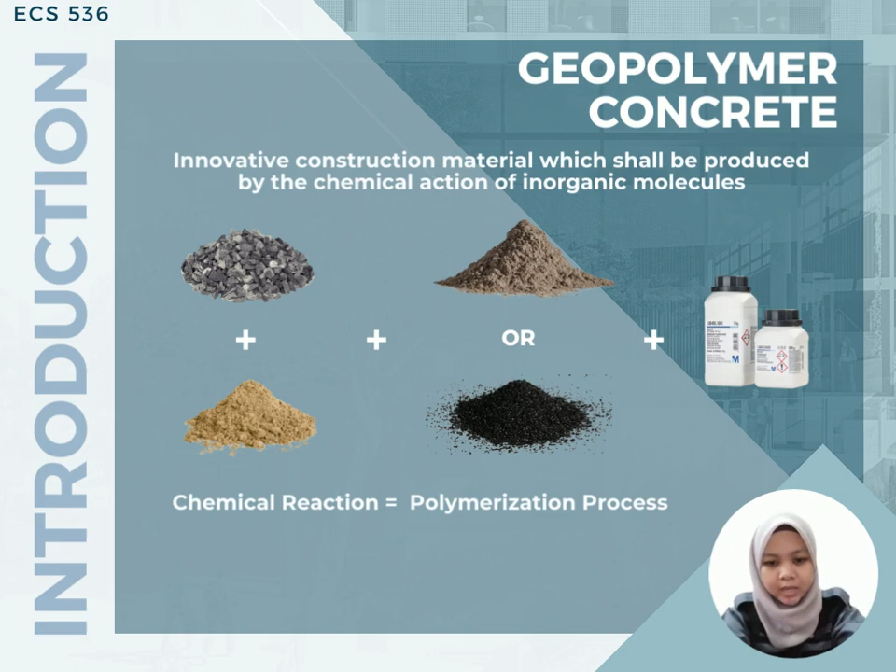Geopolymer concrete became widely employed in industry as a Portland cement substitution after its debut. The concrete floor components were constructed using the fly ash-based geopolymer concrete. According to research from the University of Queensland's Global Institute, the use of geopolymer concrete might lessen the greenhouse impact, although the self-healing process of the geopolymer concrete has not been studied further.

The durability performance of concrete is important as it needs to have an ability to resist weather attack and retain its original quality and serviceability when exposed to an aggressive environment.

No concrete structure material is inherently durable as a result of environmental interactions, and the properties of materials change with time. A material is assumed to reach the end of service life when its properties are changed or deteriorate after exposure to aggressive environments.

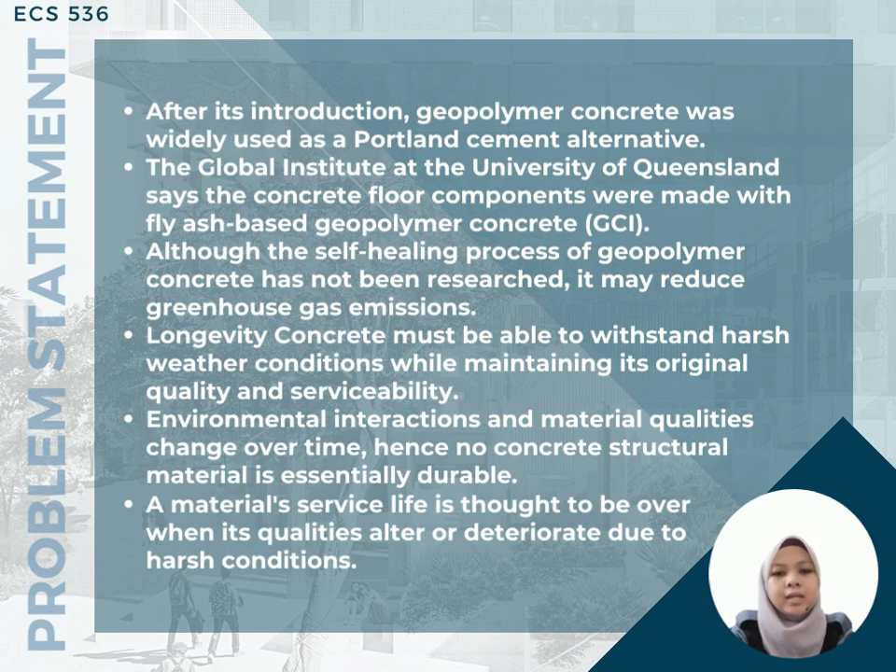Fly ash from coal-fired power plants that is low in calcium can be used to make geopolymer concrete. Low calcium fly ash is a byproduct of burning anthracite or bituminous coal. It makes up the majority of fly ash that can be found around the world.

The amount of power generated by coal-fired power plants, despite the fact that these plants are thought to be bad for the environment, is rising because of the huge amount of high-quality coal that can be found all over the world, and the low cost of electricity generated from this source. There will be a lot of fly ash available for many years to come, so don't worry.

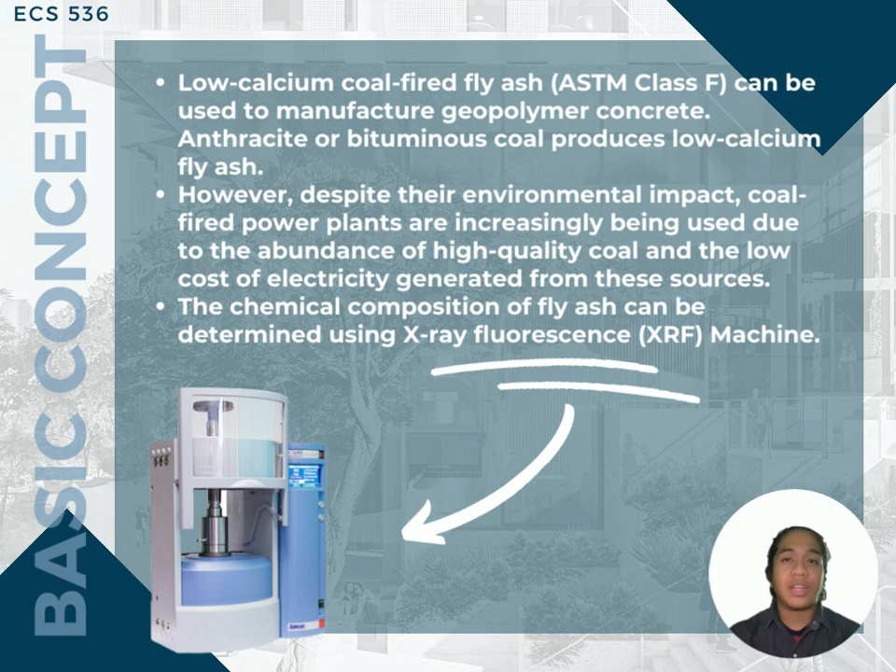Before using the fly ash, its chemical composition and particle size distribution must be found out. An X-ray fluorescence (XRF) test can be used to figure out the chemical composition of the fly ash. This figure shows the XRF machine.

Geopolymer concrete may be made using coarse and fine particles commonly utilized in the concrete industry. In the case of geopolymer concrete, the aggregate grading curves typically utilized in concrete practice are relevant. Some calcium-rich source material like blast furnace slag can be mixed in with the geopolymer concrete mix to speed up the setting time and make it easier to cure at room temperature, so it can be used for building.

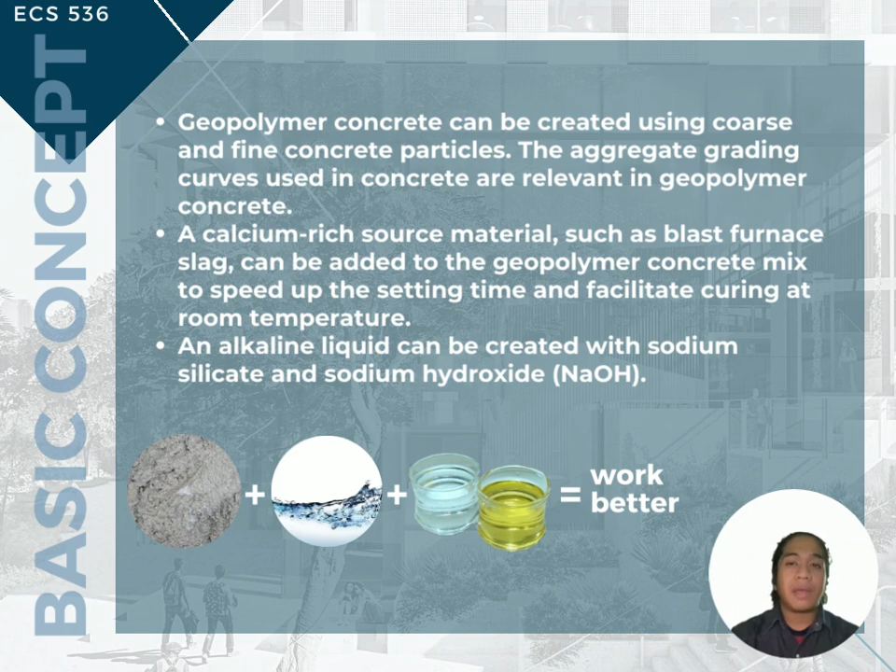Adding more water and a superplasticizer to the mix can help it work better. There is an alkaline liquid that can be made with sodium silicate solution and sodium hydroxide solution. It is recommended that the alkaline liquid be made at least 24 hours before it is used.

There are 5 properties of geopolymer concrete. First is unit weight. Unit weight of the low calcium fly ash based geopolymer concrete is similar to that of Portland cement concrete, varying between 2,330 and 2,430 kg per cubic meter.

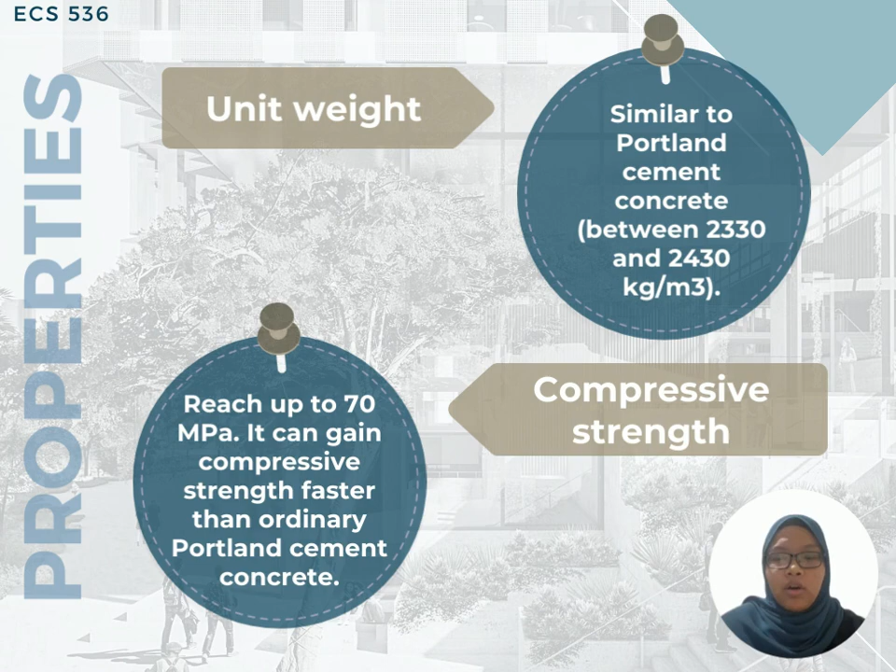Second, compressive strength. Compressive strength of geopolymer concrete has been found to reach up to 70 megapascals. Moreover, the concrete gains its compressive strength faster than ordinary Portland cement concrete. Third, sulfate resistance.

Sulfate resistant: low calcium fly ash based geopolymer concrete has an excellent resistance to sulfate attack. There was no damage to the surface of test specimens after exposure to the sodium sulfate solution up to 1 year.

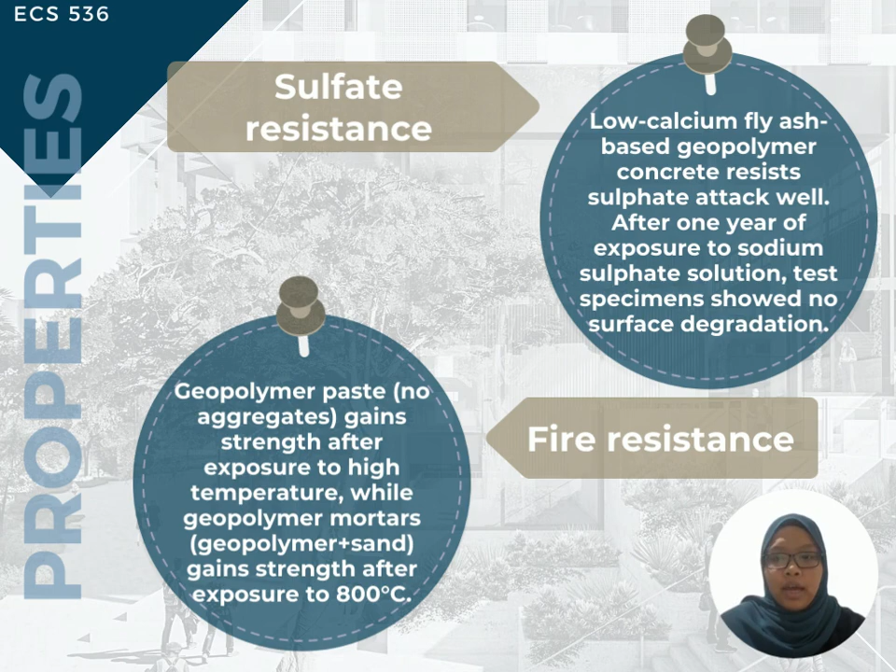Fourth, fire resistant. Tests showed that geopolymer paste, with no aggregate, gains strength after exposure to high temperature, and geopolymer mortars, which is geopolymer plus sand, sometimes increase in strength and other times decrease in strength after exposure to elevated temperature of 800 degrees Celsius.

And lastly, creep and drying shrinkage. Fly ash based geopolymer concrete undergoes very little drying shrinkage, about 100 micro strain after 1 year, compared to 500 to 800 micro strain experienced by Portland cement concrete, indicating a significantly smaller value.

The creep coefficient after 1 year of loading for geopolymer concrete with compressive strength of 40, 47 and 57 megapascal is between 0.6 and 0.7, while for geopolymer concrete with compressive strength of 67 megapascal, this value is between 0.4 and 0.5.

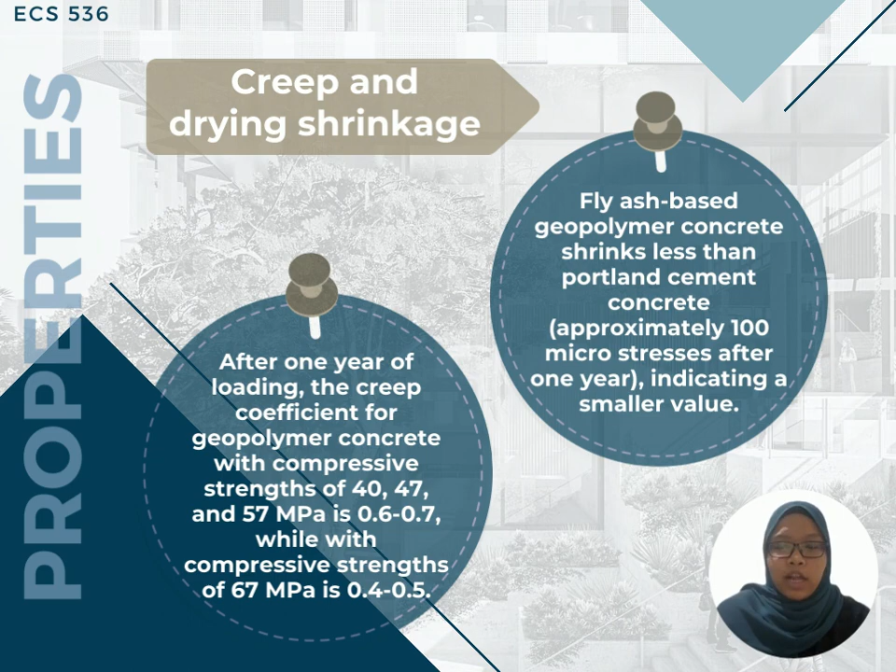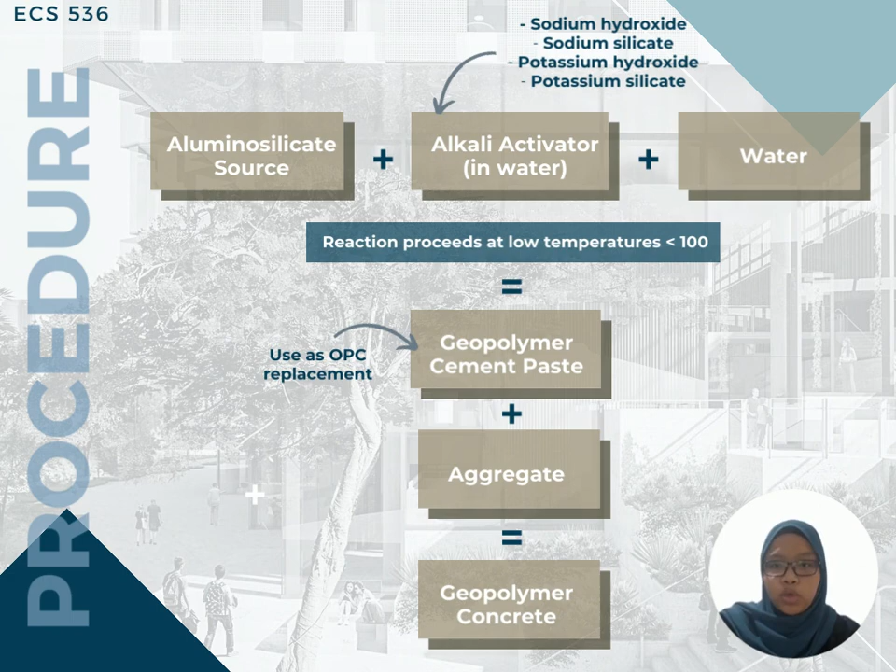Geopolymer cement and concrete process. First, the aluminosilicate source will mix with the alkali activator such as sodium hydroxide, sodium silicate, potassium hydroxide and potassium silicates, and then will mix with water. It will become geopolymer cement paste. Geopolymer cement paste will mix with aggregate to become geopolymer concrete. Geopolymer cement paste is used to replace ordinary Portland cement.

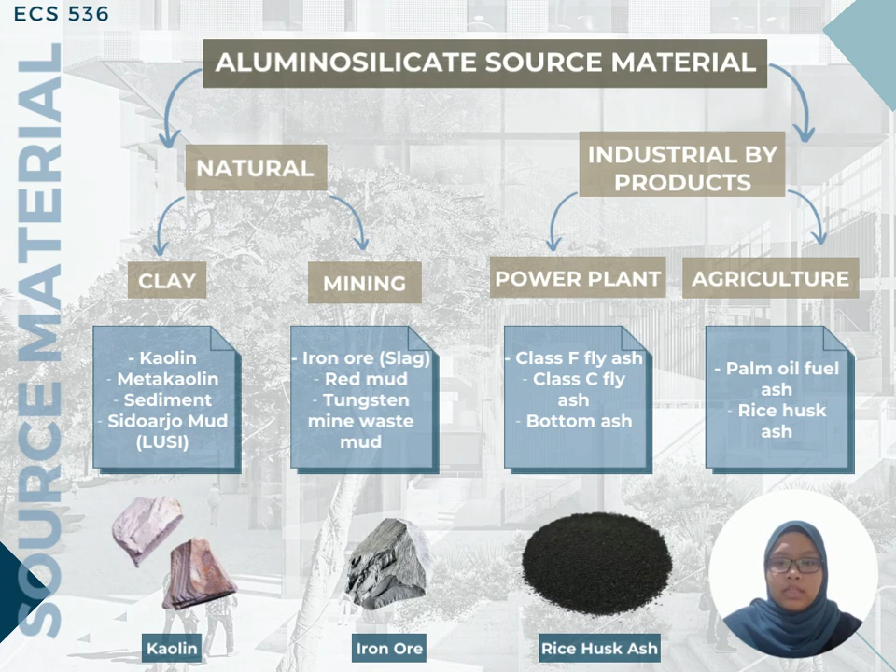Industrial byproducts are also divided in two, power plant and agriculture. For power plant, such as Class F fly ash, Class C fly ash and bottom ash. For agriculture, there is palm oil fuel ash and rice husk ash.

For analysis and results, we use a workability test. Workability of concrete is the amount of work needed to produce full compaction of fresh concrete. The workability of concrete is also affected by the maximum size of the coarse aggregate to be used in the mixture. The slump test is the commonly used method of measuring the workability of concrete.

The normal concrete has a slump value of 116 mm and geopolymer concrete GC has a slump value of 126 mm. With addition of ground granulated blast furnace slag GGBS, 40% and 60% in GC, the slump value is 119 mm and 115 mm respectively. The results show that addition of GGBS decreases the workability of geopolymer concrete.

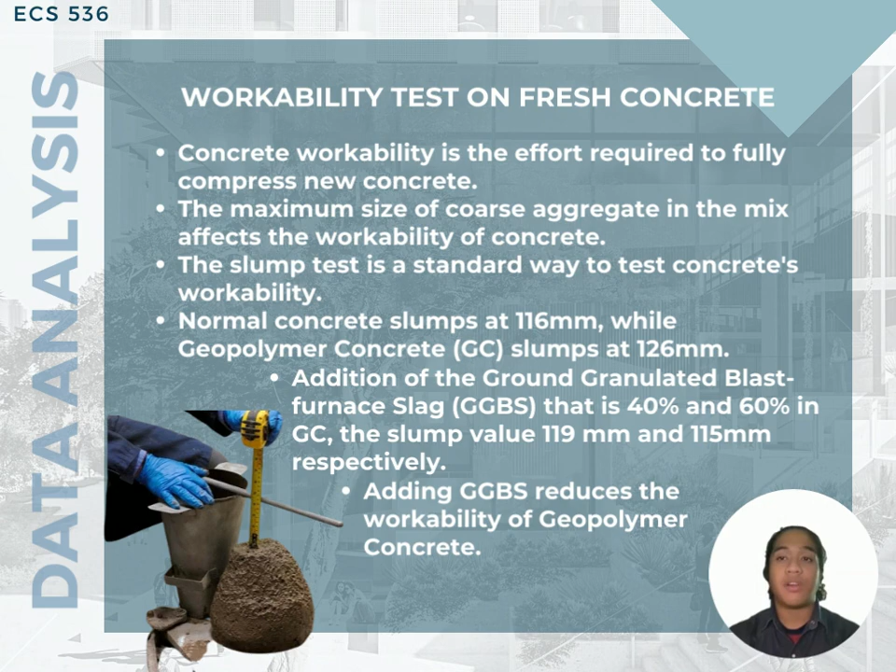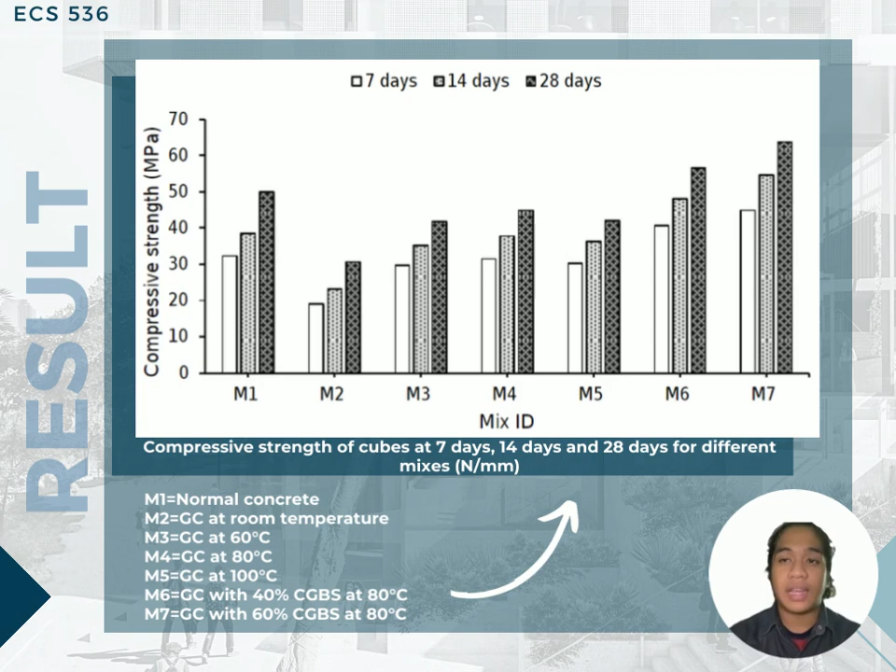This is the compressive strength of the mixtures. There are 7 mixtures at 7 days, 14 days and 28 days. So look at the bar.

Geopolymer concrete has now moved beyond an emerging technology into the space of a structural concrete that can be designed and used in structures and other applications as long as the necessary verification and testing is undertaken. The term geopolymer is very broad and encompasses a range of different concretes which may have quite different structural properties.

The proprietary geopolymer concrete used in the GCI building proved to be fully compliant with the structural performance parameters that AS3600, the specified minimum requirement for the design and construction of concrete building structures, is based on. The use of geopolymer concrete in the multi-story GCI building provides an example of how a medium-sized engineering consultancy went about assessing a new technology's fit-for-purpose suitability. It is hoped that this example may provide a path for others to explore new and innovative approaches to building that improve the sustainability of our built environment.